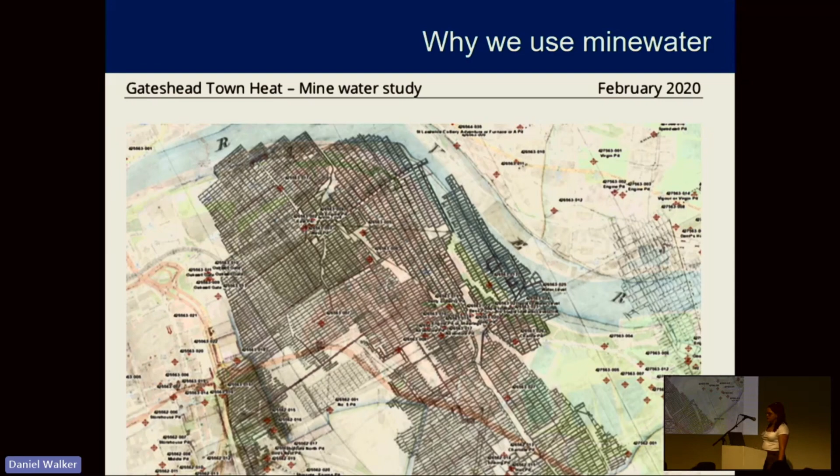So we extract the water from the flooded mines beneath Gateshead. There are a lot more technical people in this room than me who can explain this much better - that is not my field. I'll give you a brief overview, but you're probably best speaking to Dan and others in the room about the technical aspects of it.

So we extract the water from 150 metres below ground. We bring that up to our mine water heat pump, which is just down the road, extract the heat, and then it goes and heats homes and businesses around Gateshead, which is really exciting.

I think especially because coming from a mining background, my granddad worked down the pits, my mum worked in the pit kitchens, and I'm very honoured to have my mum in the audience today. I'm probably more nervous about the fact that my mum and my kids are here than doing any other presentation. I don't normally bring my kids - Wednesday is my non-working day usually, but I really wanted to be here to do this speech. Thank you to everybody for accommodating me this morning.

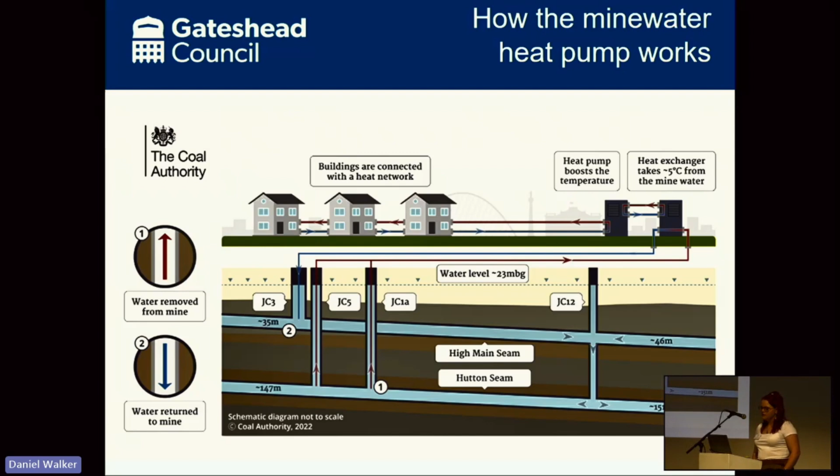So back to business. We've got the mine water boreholes, and everybody gets really excited about visiting the boreholes, but honestly, you can see more in this picture than you can in real life when you lift the covers up. So we went through that journey.

We extract at about 12 to 15 degrees, and we re-inject at about 9 degrees, and it goes back in and just gets reused to provide that continuous heat source to Gateshead.

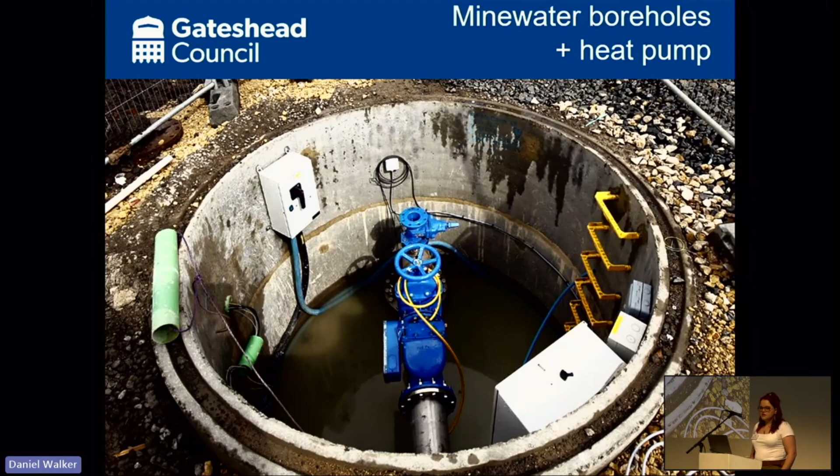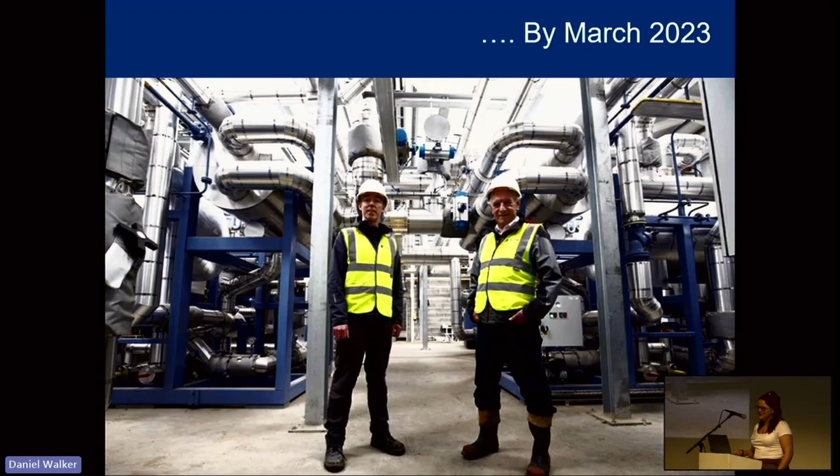This is also just inside our mine water heat pump that we operate to provide that heat to Gateshead. Again, everybody gets really excited, but unfortunately you can't go in there either because of the use of ammonia, so it's just better to look at the pictures.

One of the things that's made our scheme really successful in Gateshead is the support of local politicians and councillors. They've really seen the vision that Jim had and helped to drive that forward. This is Councillor McElroy, who's had a massive influence on the network, and I think that's made a big difference. I believe mine water is something we need to develop across the UK, it's a massive opportunity, but not all councils are as willing to take the risk as Gateshead have been. So thank you to the leaders and politicians for enabling us to get this groundbreaking, quite literally, scheme off the ground and providing that heat.

We want to continue that journey of decarbonisation, so we also have 2 solar parks feeding into our network, providing about 4 megawatts of electricity. So what that means on sunny days like today, where we get a lot of power in from the solar farms, is we can turn off the CHP and use the electricity from the solar to power the heat pump, and we don't need to use gas, which is getting more and more expensive. We're able to manually monitor and turn up and down our different assets feeding into the network to really support that decarbonisation journey.

I did mention before that it feeds into our main network. So this was the original master plan that we started with. I've added a pink star to show you where we are today, just to match the tanks on the energy centre. So the green network is our original network.

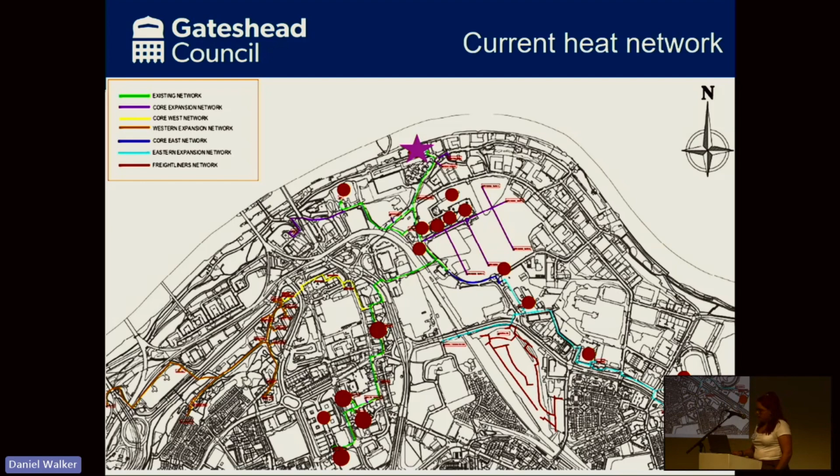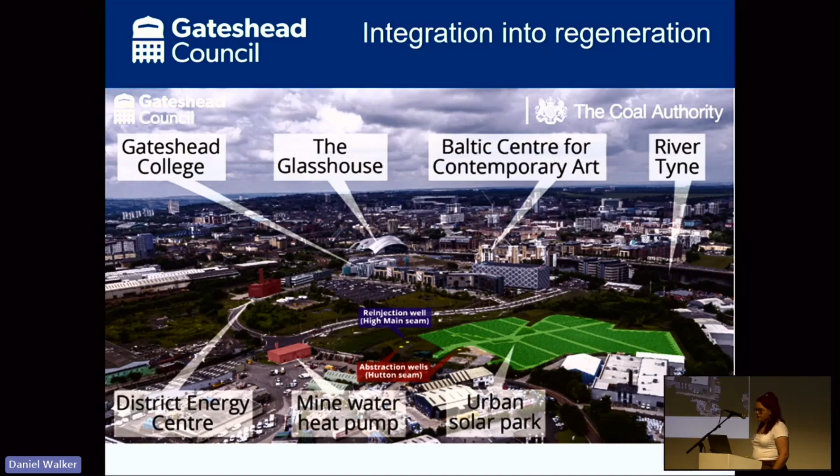We use our heat network to provide a variety of loads to multiple different kinds of buildings. So we've got residential, we've got big buildings like this, we've got leisure centres, civic buildings, and then we've got future connections we're looking at, which you might have seen the building sites depending which way you came in, where there's plans for a conference centre and arena on Gateshead Quays. With funding in from NECA, they'll hopefully be going ahead in the next year or so.

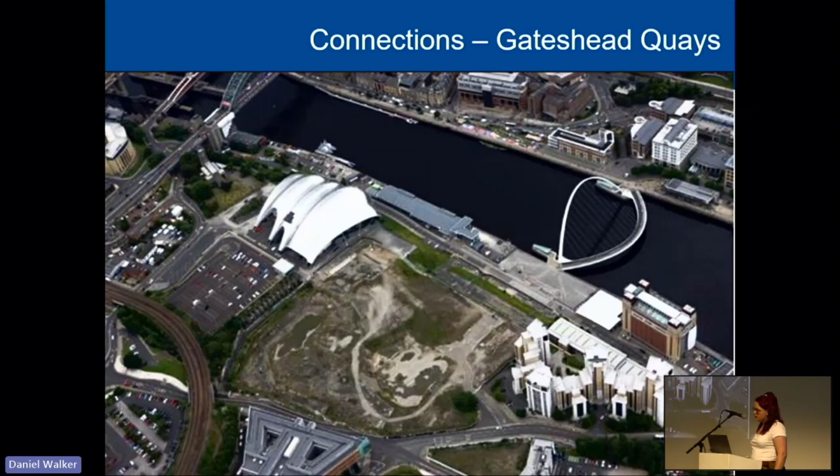We've also got future connections. The yellow extension that I talked about is that we're currently in negotiations with Tesco and Trinity Square for connecting them. That's their biggest gas using site, so that'll be massive if we can get them on and help decarbonise such a large operation, which also includes 1,000 student flats above it.

We're also in contact with the QE Hospital and local businesses such as iPark.

I think the main thing for me, though, it's great connecting all these big buildings, but to me it's about the end users and those individuals, people's lives that we can make a change to by providing low-cost, low-carbon heat.

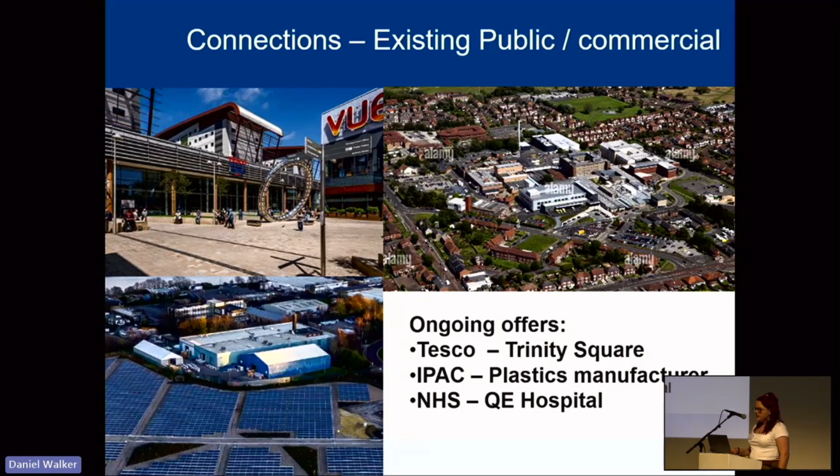So we have done new build housing, a new build housing estate just across the Felling bypass, and we purposely left these pipes above ground just as a talking point so people can see. It's really hard for people to visualise what district heating is when it's pipes that are probably 2 metres below ground, whereas we can keep those pipes there and show how it works a little bit more.

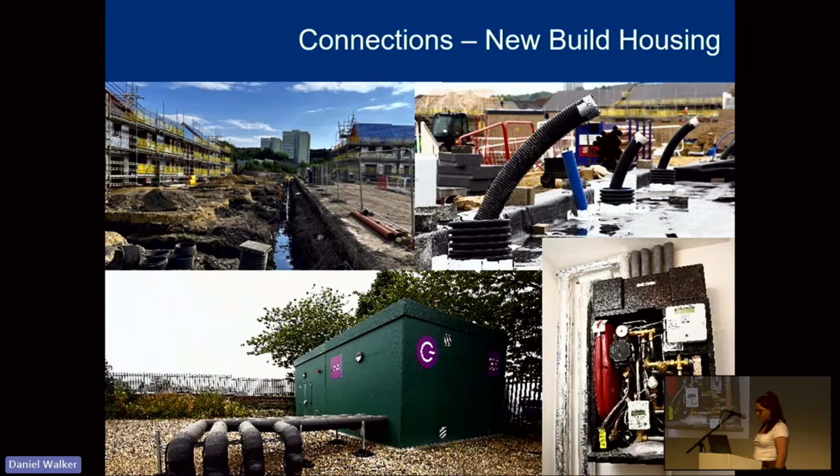As I mentioned, we also have done retrofit. So this is a council estate just down the road from the new build housing. We've done a pilot scheme of 16 homes, an assisted living facility, and a church to connect them to the network. There was 15 council-owned properties and 1 privately owned property, which we managed to get onto the network as well. This is one of those areas that is in quite high levels of poverty.

It's one of those areas that probably has been impacted in the past by mines closing. So if we can support them positively by reusing the mines to do something different, it's helping them reduce their energy bills, but then it goes wider than that. If they've got reduced energy bills and a warmer home, they're more likely to be an active member of society, more likely to be able to go to work or to school. If having a warm home makes such a difference to people, and it sounds mad that pipes in the ground make such a difference, I think that's a really rewarding part of this work.

And I've just seen Fiona there pointing, going, that's where the living lab is. So you'll hear more about that from Fiona soon, because it's literally just across the road.

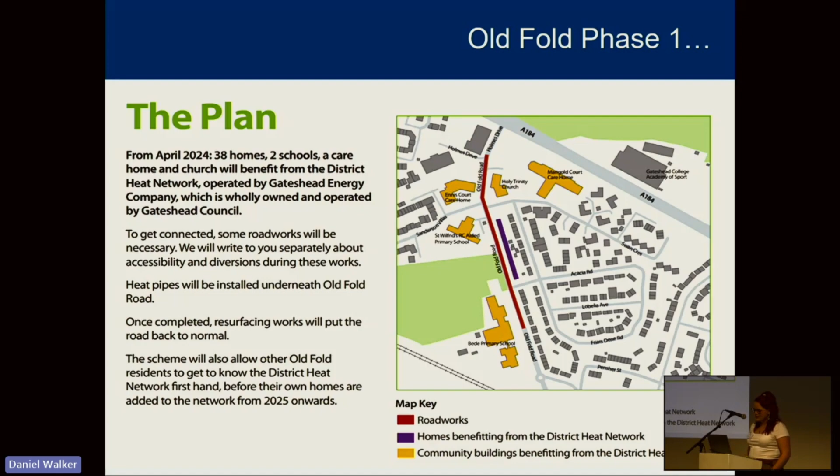To be honest, the massive part of this project was the resident engagement. We hugely underestimated how much resident engagement there would be, but in a positive way. They wanted to hear all about it, and they were really interested in knowing where the heat's coming from, which was really exciting. We dug up their gardens like this over summer, and they were still happy about it, which is a massive achievement.

We've done this without changing any radiators in their properties. We've connected to the existing wet system that was already in there. We've done some studies with Fair Heat and shown that this was successful and they didn't need to be changed, and they've got happy, warm homes.

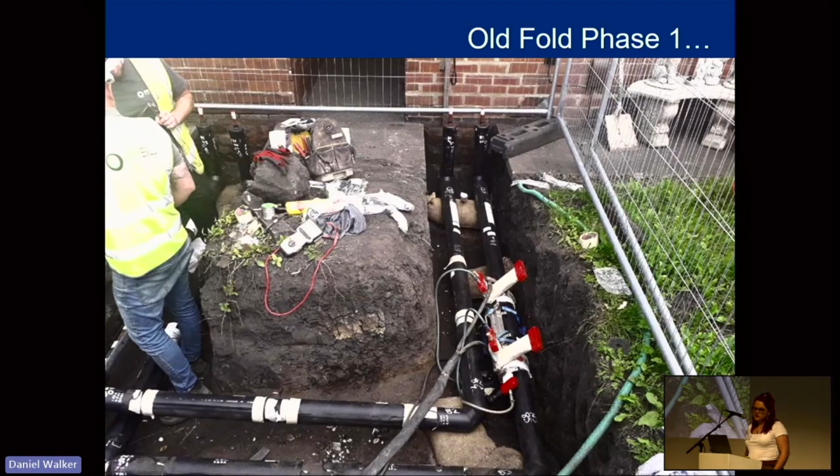Their heat interface units, which you have instead of a boiler on the outside of their properties - don't worry, that wood was just temporary and they've been properly boxed in now.

But they got into the spirit of things at Christmas, and we often walk around and see them decorated for different things, which just shows how on board with it they are.

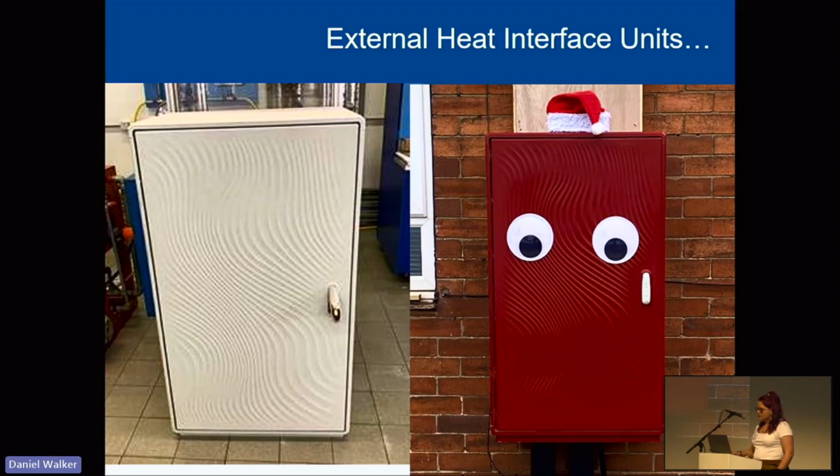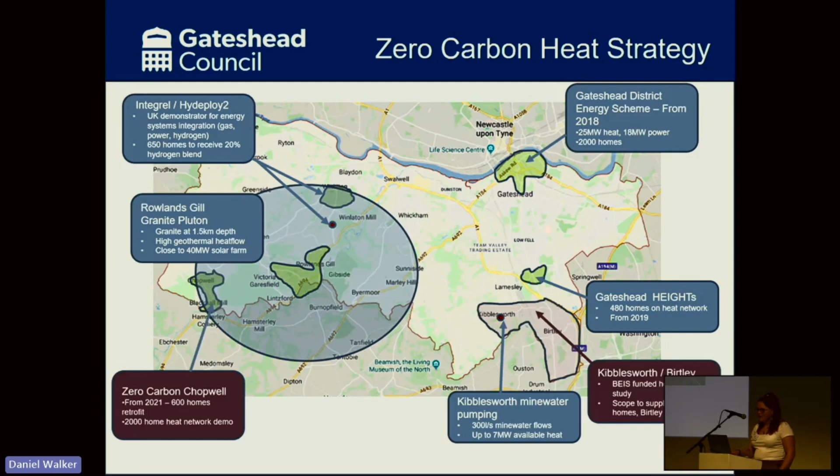Looking forward to the future, we want to decarbonise further, so we are looking at deep geothermal as well, exploring the opportunities in Gateshead. Now, my technical knowledge of deep geothermal - probably all the technical people are going to shake their heads at me when I say we've got really good rocks in Gateshead. But we have, and we've got a really good opportunity to drill into these.

So we're doing some studies to look at connecting geothermal into the network. The reason we want to do that is that we believe connecting homes to the heat network is a more cost-effective solution to decarbonising properties than connecting to a heat pump. This shows the cost to us if we were to connect to the heat network compared to connecting individual properties to a heat pump. We also believe it's more efficient, and there's less impact on the grid, which we all know has its constraints.

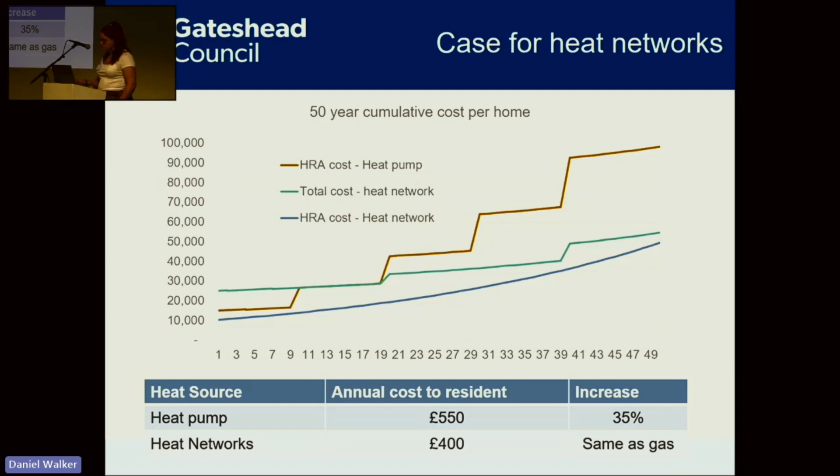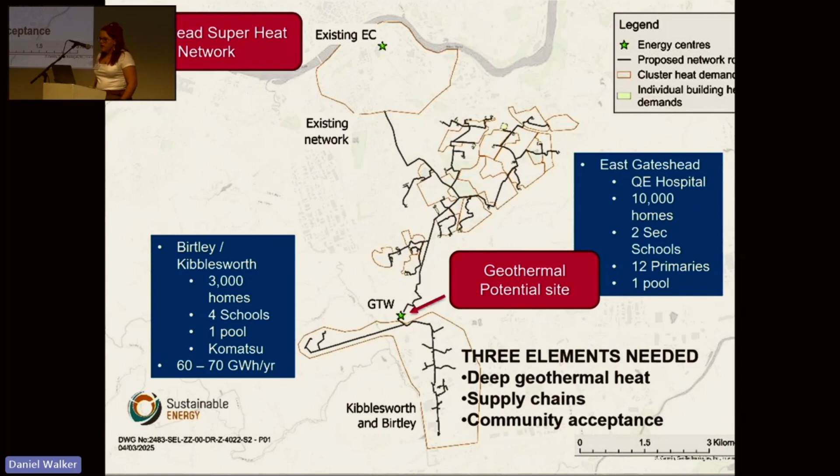So looking at a map of how that would work, you can see our existing network at the top, and then coming down into the Team Valley area, looking at drilling sites. There has been work done to look to see if that's possible, and surveys are being carried out for this opportunity.

Now, all of this doesn't happen if we don't have the right people on the ground to do this work. And I'm a big advocate that there is a place for everybody in heat networks. Most of my transferable skills come from 10 years as a manager in retail in Iceland, the supermarket. So there really is a place for everybody.

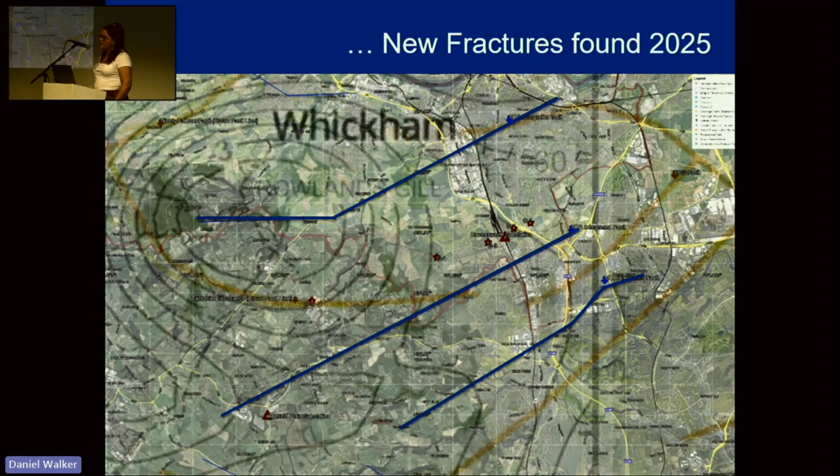But looking at the green skills that we need, there's a wide range. We need project managers like myself. We need people literally on the ground doing the civils. We need people who can service this equipment. So there's such a wide range of skills needed, and it's a really growing area that we need people to get more engaged with.

I think that will also support those areas where employment is falling, where we can reskill people, upskill people, where things like gas are dying out, where we can upskill people to take on these new opportunities as part of the green agenda.

Now, my next slides I'm going to skip over, mainly because I realised I'll be duplicating what Michael's going to be speaking about in his next presentation. So apologies, but I will talk a little bit about them to kind of boost up Michael's presentation, because I'm sure it's going to be great.

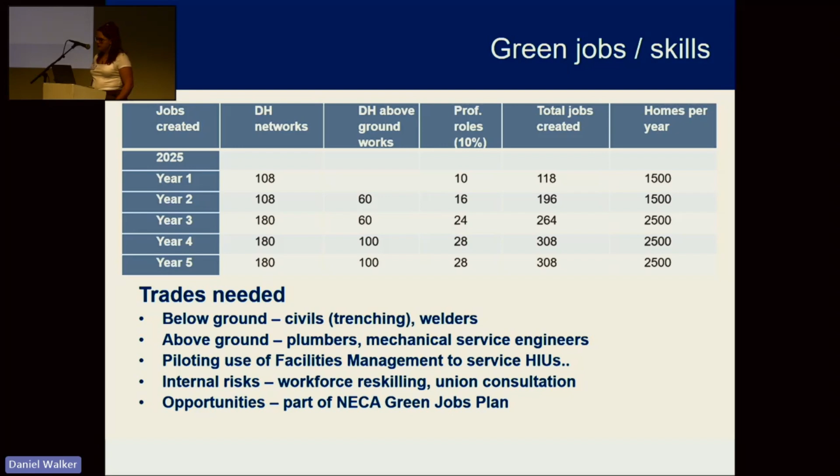So we did a lot of work as well, as I said, about the engagement with Gateshead residents, and we did a forum with them. There is a video which I can send people the link to. Honestly, anybody who works at local authorities, if you haven't done citizen engagement work with your residents, please do, because it was so rewarding.

They came up with ideas over those sessions that we just never thought would come from residents. We never thought people would care about these things, or that it would take years to come through as the council, and it was just so insightful and so rewarding. I think it's really important that we remember those people are the end users, and they have thoughts and opinions, and great ideas, and just because they might not have the technical background, or might not be working in the field, everybody should have a voice when it's impacting their local communities.

So I'm going to bring it to an end there, but if anybody's got any questions, then please let me know.